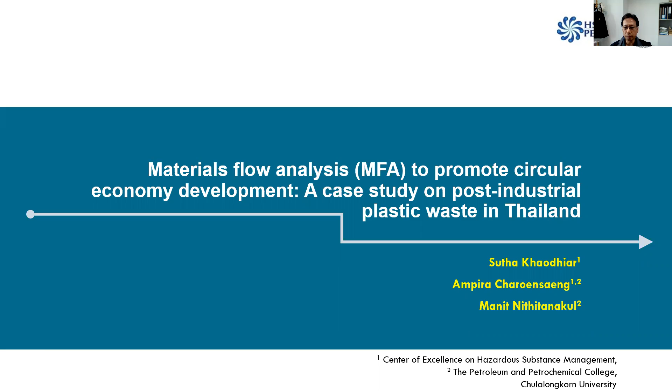Plastic waste is one of the big problems in the country of Thailand. There are many reasons for plastic waste problems. First of all, an ineffective plastic waste separation at source. So plastic ends up mixed with other waste and other plastic, both in the industry and in the household level. Plastic waste normally contains high contamination and high dirtiness level.

A lot of plastic waste is multi-layer and mixed plastic waste. So both categories of plastic need an extra treatment option. Overall, plastic is non-biodegradable. It usually persists in a landfill for a long time, and burning can cause environmental pollution. It's also one of the big causes of marine litter problems.

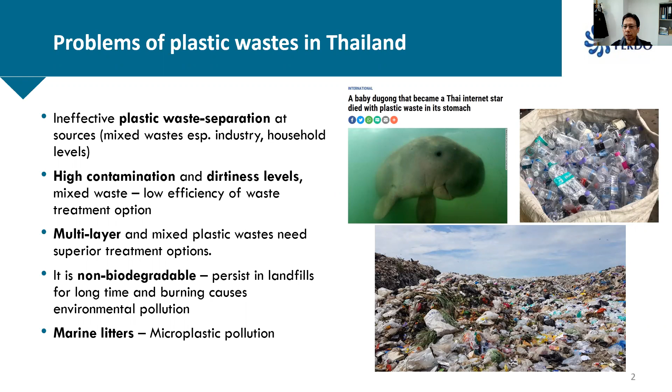This figure shows Thailand domestic consumption of selected plastic products. We can see that overall, the consumption of plastic increased from 2012 to 2018. The plastic product that has been consumed the most is bags, followed by bottles and food trays and cup boxes.

So in order to solve plastic waste problems, we need better information on what kind of plastic and how they are collected and treated. We need new design for the system. We need criteria to measure the progress, and we do need a good waste management scheme and technology.

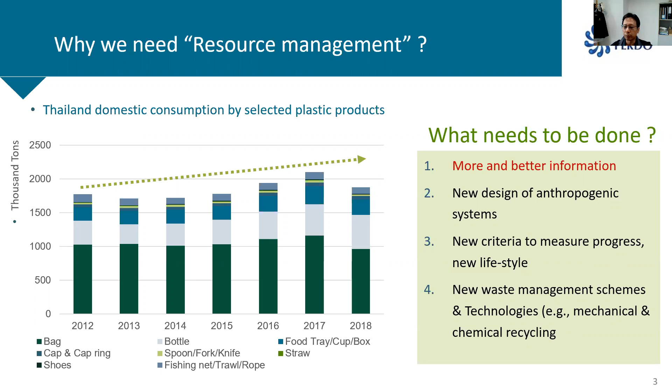Today, I will talk about 3 of our research topics related to plastic waste and circular economy. Overall, in every project that I'm talking about today, we utilize material flow analysis, or MFA, to study the plastic waste problems. So what is MFA? MFA is a systematic assessment of the flow and stock of the material within a system defined in space and time. So sometimes it can be referred to as the product metabolism.

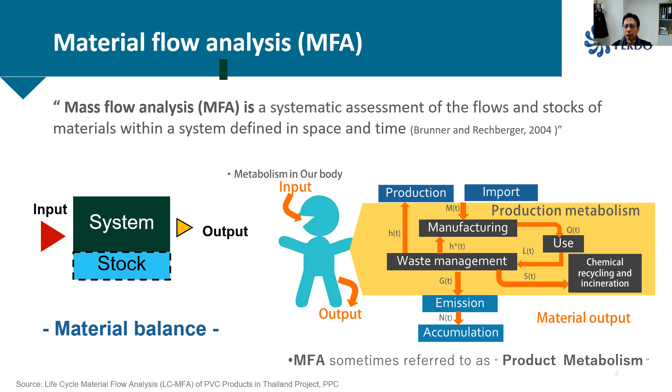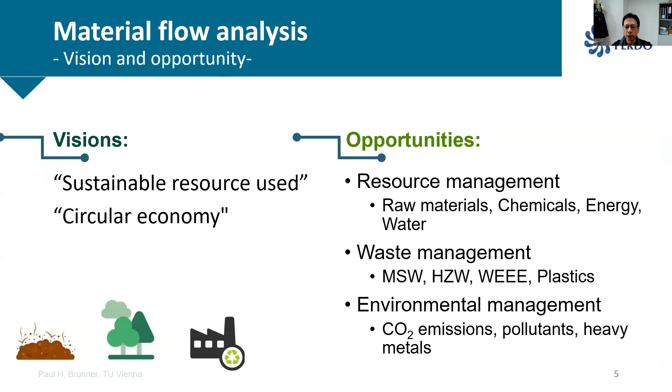We can use material flow analysis to analyze the source, the consumption, and the treatment process of each waste, in this case plastic. It can be used for sustainable resource use, to promote circular economies, and to provide an option for resource management, waste management, and also environmental management. Material flow analysis can be used in all levels, from the global society down to the individual or citizens. In our samples today, we have both the country level and the company level.

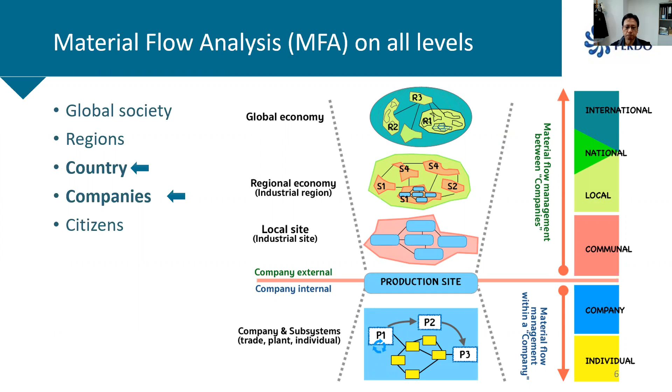So we do need a good waste management solution, especially for plastic. Plastic is mainly produced from non-renewable resources, fossil-based oil and gas, and transformed by petrochemical process. There are various types of plastic for consumption. For example, PE, PP, PS, PC, PVC, and other plastic.

It has been used in various levels: industry, commercial, medical, household, and overall, most plastic is potentially recyclable. It can be recycled and can be used as a raw material for producing products.

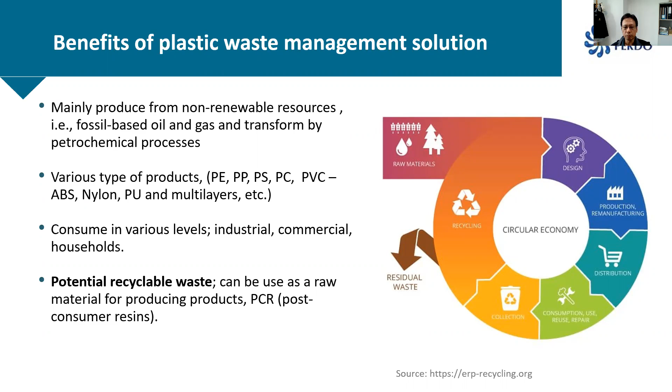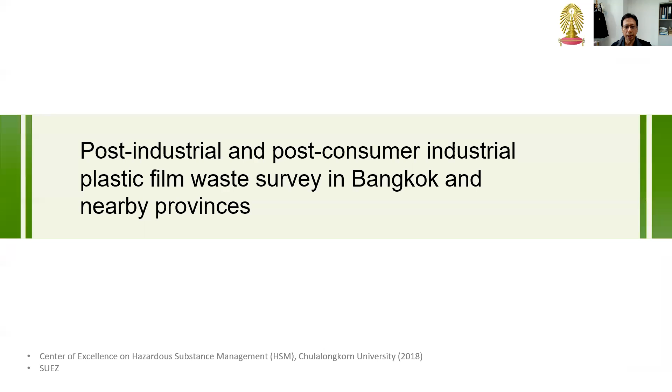My first study today, I will talk about the post-industrial and post-consumer industrial plastic film waste survey in Bangkok and nearby provinces. This is the overall MFA diagram of industrial waste. So we are concentrating on the industrial part, but in this figure, we also show the commercial or consumer household part as well on the bottom.

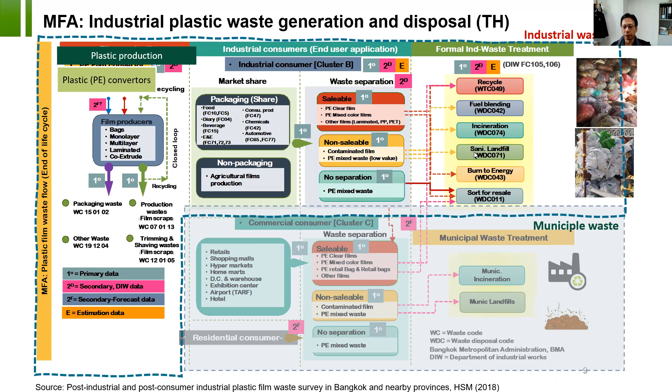So in general, we divided the phase of plastic use into three main phases: the plastic production, the plastic consumption, and the treatment. For industrial use, after the plastic has been used in the industry, it can be managed and divided into three categories. The saleable plastic, for example, PE clear film, PE mixed color films, and other films. The non-sellable and the no separation. And these are the treatment options, including recycle, fuel blending, incineration, sanitary landfill, burn to energy, and sort for resale.

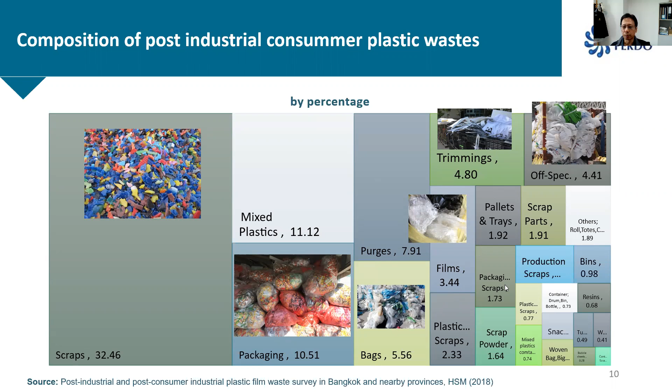The composition of post-industrial consumer plastic. So in general, about 30% of post-industrial consumer plastic waste is scrap. And mixed plastic and packaging account for about 10% each. Film is a small part of the plastic waste, accounting altogether for probably 10 to 20%. So we can see that this number is showing you the amount of plastic waste from the industry.

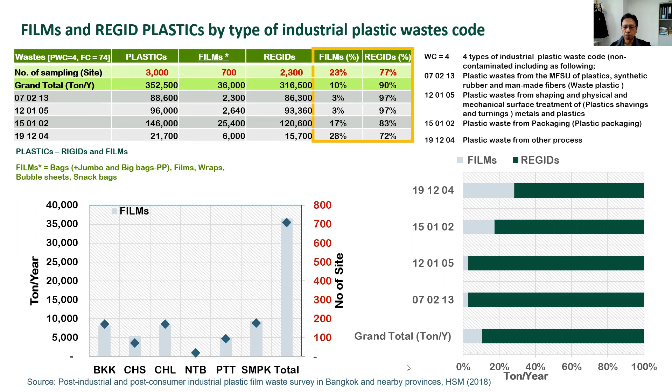In Thailand, if you are an industry, you are required to register your waste by the 6-digit number. So after we sourced the data, we found that of all the industries in Thailand, there are 4 main waste codes that are plastic, and from those codes we get the total amount of the plastic that has been registered into the system. We can see that film normally accounts for about 10 to 20% of the total plastic waste. This figure on the bottom left shows you the total amount of plastic in tons per year in Bangkok and the nearby provinces.

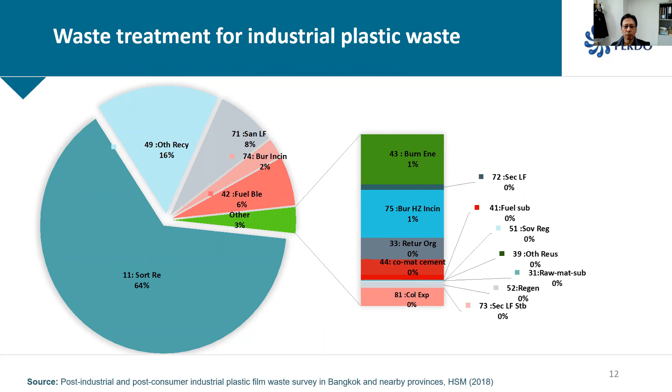So in general, plastic is collected and recycled in many ways. We can see that more than 65% of plastic has been collected and resold, and about 16% goes to recycling factories. Other than that, most of it goes to fuel blending, incineration, and only a small amount goes to landfill.

However, if we look carefully, this is why we concentrate more on film plastic, because film is very light, very small in weight, and it's the one that you normally find ends up in the landfill. This figure shows you the type of plastic film waste and their treatment method. The total film waste, about 10% of all the plastic waste from industry, is altogether about 36,000 tons per year. This is collected from 700 sites in Bangkok and 5 areas. It includes bags, labels, snack bags, wrap, bubble sheets, and films.

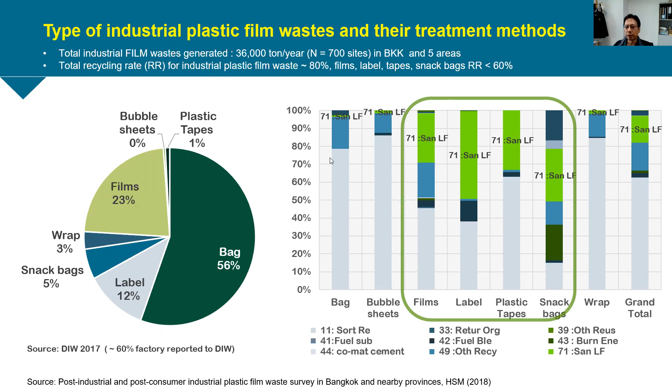So these are the treatment options that have been registered in the database of the Department of Industrial Works. We can see that film, label, plastic tape, and snack bags have a big portion that ends up in the landfill. So even though overall plastic has been collected, resold and recycled, or at least blended as a fuel, there's still some plastic, especially film plastic, that ends up in the landfill.

The second study that I'd like to mention is the other part of that study, where we concentrate more on the household part. However, for the household part, we only concentrate on PP and PE plastic. For household, we divide it into production, consumption, and waste generation. We divided PP and PE plastic into two groups, food and non-food plastic. Most plastic goes to recycling, some goes to landfill, and some pieces from the household have been missing from the system.

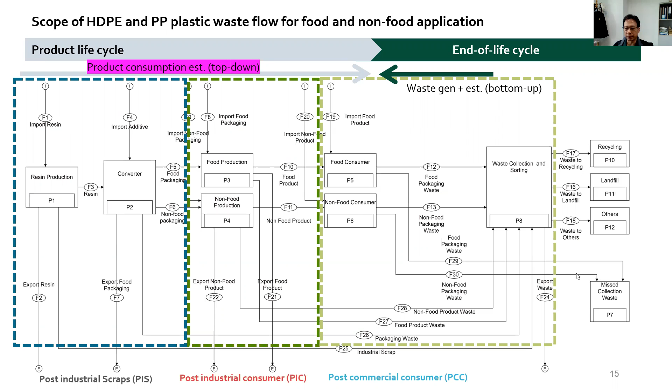These are the numbers that we calculated from our study, from the school, hotel, shopping mall, coffee shop, bakery and restaurant, and apartment and condominium, both for HDPE and PP.

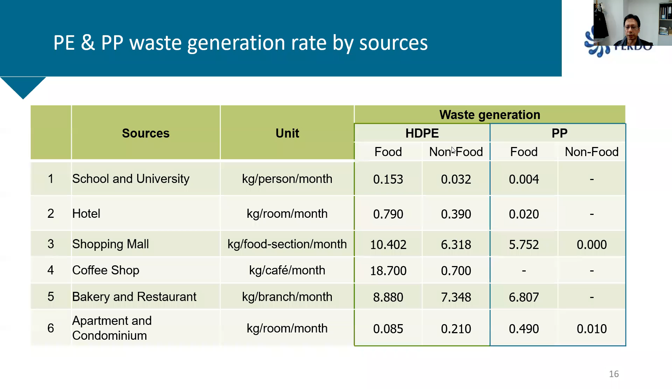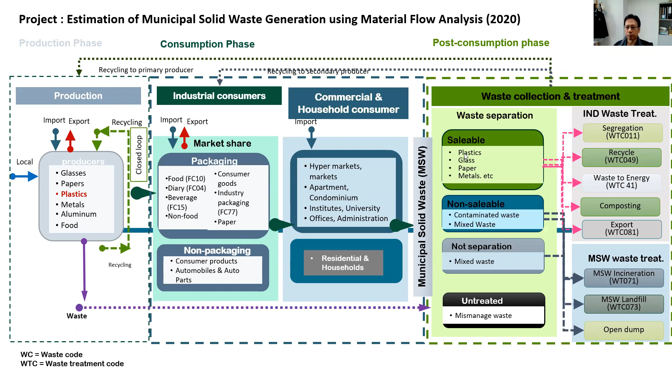The last study that I'd like to mention in today's talk is our ongoing project on the estimation of municipal solid waste generation using material flow analysis. In this study, we want to revise the number of solid waste generation and the percentage of recyclable materials, including glass, paper, plastic, metals, aluminum, and food in Thailand. Again we use material flow analysis as our framework to set up the boundary of our study, from the production phase to the consumption phase and to the treatment phase. We would like to do it from left to right and also from right back to left to cross-check the number.

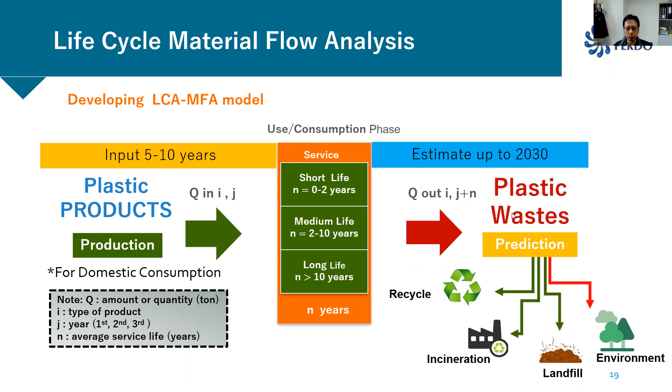I'll explain it later. When I say from left to right, we want to know how many products we are using in the household or in industry and how long we keep them. What is the service life of each product? Then we try to estimate the waste that will come in the future. For plastic, we selected 12 target products in this figure, and we only have short and medium service life. So we try to estimate how long we use these products, how many we use during a period of time, when they become waste, how much waste there is at a certain time, and what category of waste management we are doing at the moment.

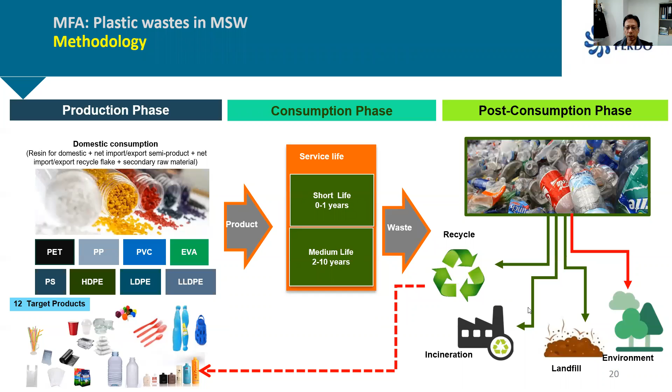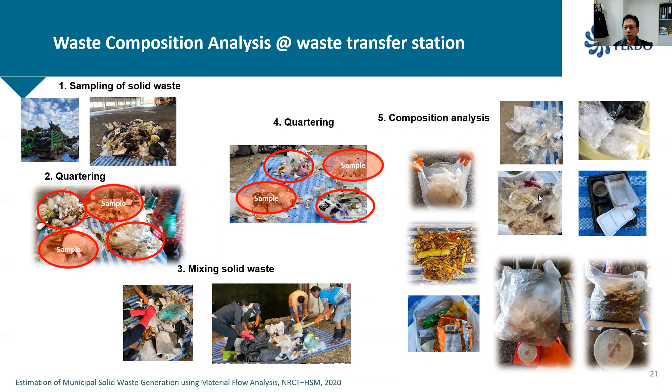On the other hand, we also want to cross-check by working back from waste management to the consumption part. So we go to the waste treatment facilities, landfill, transfer station, incineration, collect solid waste samples and analyze their composition, especially plastic. As I mentioned earlier, even though plastic in the big picture has been recycled effectively, most of the plastic film, especially bags and packages, ends up in the landfill. This is what we found at the disposal site.

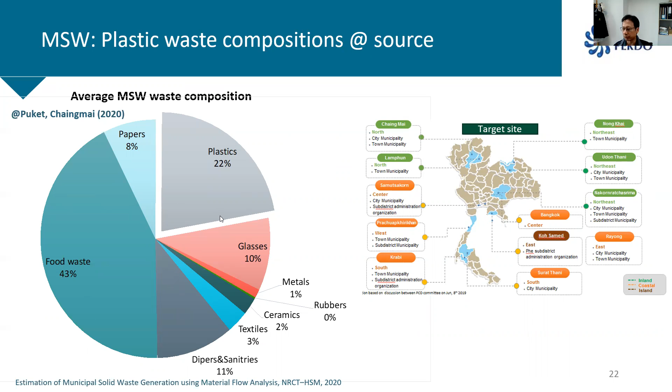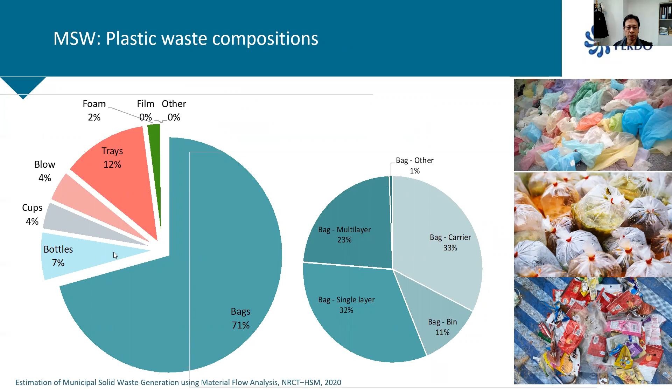In this study, we target sampling every part of the country. At the moment, we have finished 2 big municipal areas, Phuket in the south and Chiang Mai in the north. This is our initial result. We found that of the waste at the disposal site, 40% is food waste, and plastic is still about 20%. For plastic, the bigger part of plastic waste is still bags, followed by trays. Normally, bottles are collected separately and resold, but the bottles that end up at the disposal site are normally dirty bottles.

So these are the waste compositions. You can see that these are all the plastics that are the problem at the moment: the bags, the film plastic, as well as the multi-layer plastic.

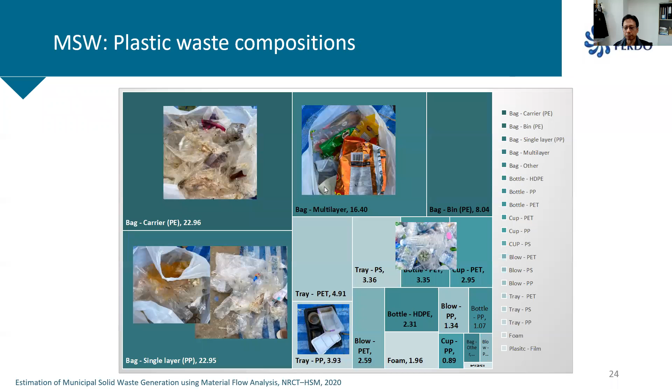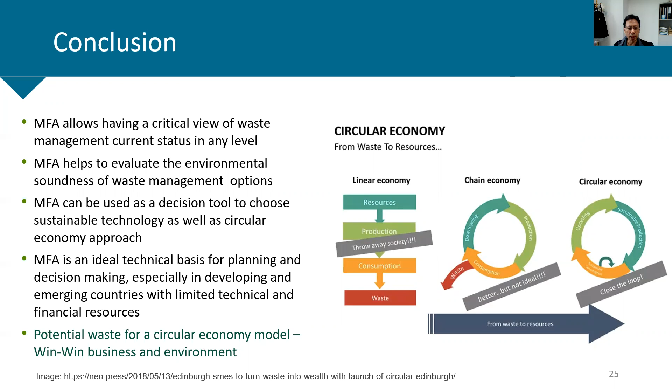So overall, I think the study shows you that in Thailand, as in many countries, we are doing quite well in terms of percentage of recycled plastic, but there are still some categories of plastic that have a problem and end up at the disposal site, in this case films and plastic bags. We think that MFA can help us see the critical view of waste management, evaluate environmentally sound waste management options, and it can also help promote the circular economy.